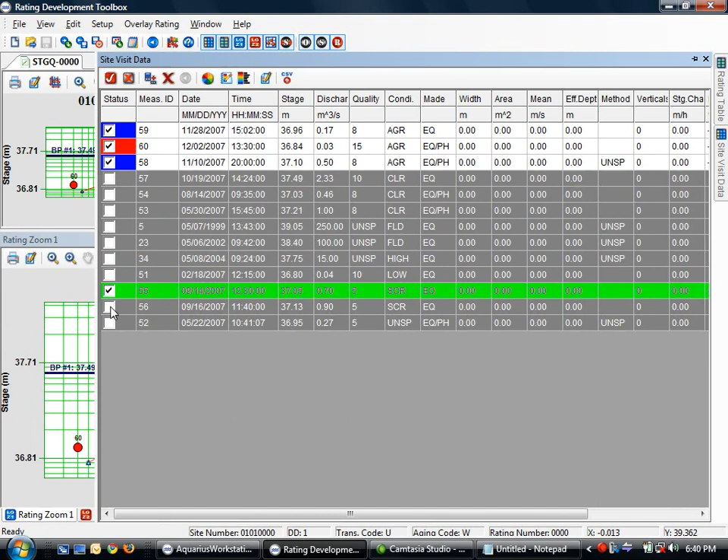And we've got some scour measurements down here at the bottom. So I've just switched on my measurements that fall off the curve. And you can see here, indeed, those are the measurements that are falling off the curve, and they're falling in the correct directions. Now let's look in our time series view over here. And you see that my green measurements that fall below my base rating curve, they're the scour measurements. They're on the rising limb of this hydrograph. And my fill measurements over here, aggradation of the control, fall on the falling limb of the hydrograph.

Now this is very typical. When you have a rising limb of a hydrograph, it tends to scour out, and then on the falling limb of a hydrograph, you tend to get fill on the control feature. So in this particular case, we're probably going to deal with two shifts, and we're going to shift in between this peak on the hydrograph and then back down. So to do this, we're going to start in the shift manager. And I don't have any shifts here, that's why most of the controls are actually grayed out, but I'm going to start by inserting a shift. Yes, I do want to insert a shift.

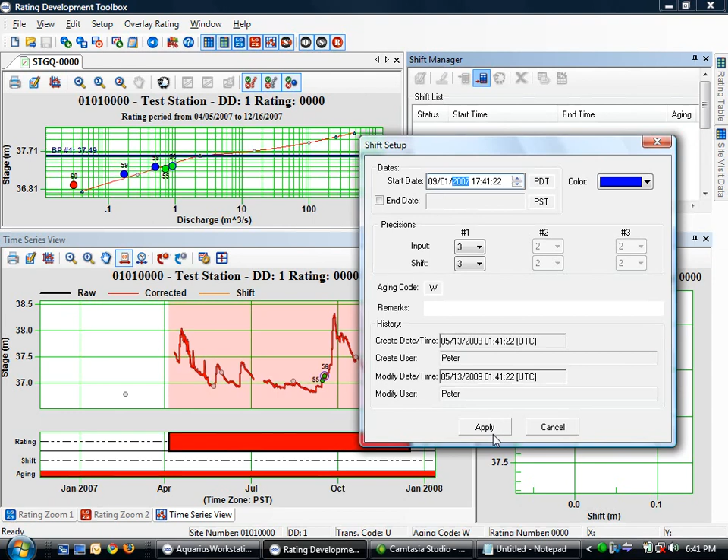Now the start date for this particular shift is something we're going to have to look at very judiciously. So the start date on this particular shift is probably the start of the rise of the hydrograph. So in this case, maybe around September 2007. So I'm going to go to September. I'm going to start it on the 1st. We can adjust these dates later. And it's 2007. Now I'm not going to define an end date at this particular time. We're just going to let it prorate forward. But we're going to come back and probably define an end date for it when we know when it should end. I'm going to click apply, and you can see here I now have a shifting bar here that's saying that this particular shift is in effect for this time.

Now if we look at how we construct a shift, I'm actually going to pin this off to the side so we have a little more room to play with. So my shift manager is down on the side. We have various inputs and we have various shifts to those inputs. These are both values of stage. So this is essentially a stage value where I want to pull away from my base rating curve, and then the shift value is how much do I want to pull the rating curve apart from the shifted curve.

So the inputs here of 0.1, it's the default value, but it's not going to match the stage values that I'm dealing with here. So the first input, probably useful to put that around 36.8, around the bottom of my curve, maybe 36.9. So I'll put that in as my first value. And I'm not going to apply a shift at this point, but now I'm going to turn on my second shift point, and it's going to go 0.1 up from me, so around 37.

Now I actually want to go up to around 37.4, 37.5, because I know my shift is going to blend back into my base rating curve, essentially where I'd make a transition from section control to channel control. And we talked about that in the previous video. That's going to be about what my break point is. And if we look over here, my break point is 37.49. 37.4 is probably a good value to start coming back into the base rating curve at.

Again, we can adjust these later. We're going to do most of this stuff visually. These are just some good starting points for us. A few other things in terms of adjusting the date and times associated with our shifts. You can start by changing the start times and end times. You can tell it to snap to specific values. So if you only know to within a day, you can tell it to snap to the nearest 24 hours. And all of this we can do down on the bottom here as well by adjusting the dates of applicability. But let's go ahead and start developing this shift.

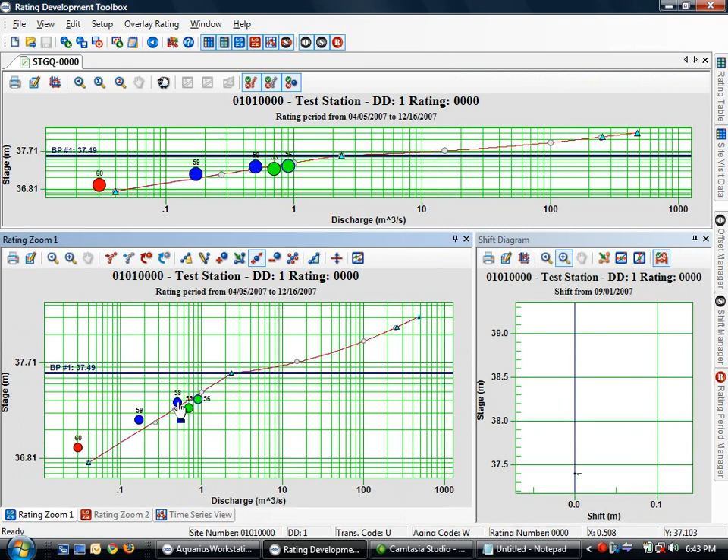I'm going to click here. I'm going to go back to the shift diagram over here, or sorry, not the shift diagram, the rating zoom 1. And we're going to look at shifting this curve out to hit these measurements 56 and 55, the ones of the scour condition. So let's rescale ourselves over here in the shift diagram. And the shift diagram is really where we're going to develop the shifted curve. And you can see here the measurements falling above the rating curve and these measurements falling below the rating curve.

And what we want to do is essentially pull our shift points out and split the rating curve at a certain point. And you can see I've done that right there. I've shifted away from the base rating curve to form that. And that's a very classic shape. That's called a knee bend. This is the hip, the knee, and the ankle down here. And essentially what I'm saying is I want the base rating curve above a certain point. I'm going to break away from it and do a smooth transition. And then eventually, we don't know any further below there, so we're going to apply a constant below that.

And you can see what that shifted rating curve looks like right here. We'll look at it in log space. We'll just zoom in right there, and you can see I'm attached to the base rating curve at the transition, and then I go through those two measurements, and then I continue on down. So that's what that shift looks like. If we want to look at that in rectilinear space, we can do that as well. We'll have to zoom in quite a bit here just due to the scales.

So let's zoom in all the way down at the bottom of the rating curve. And you see there, in rectilinear space, there are my two measurements falling off the base rating curve, and I'm adjusting my curve to that blue line that's going to fall away from them. And again, I join back in around the transition to section control.

We can click on these measurements and have a look at the error and what we're dealing with. So the original error was 42.6%, but due to the shift, we're now within 0.2% for this particular measurement. Let's look at this one, measurement 56. Again, very small errors associated with them now due to the shifted curve.

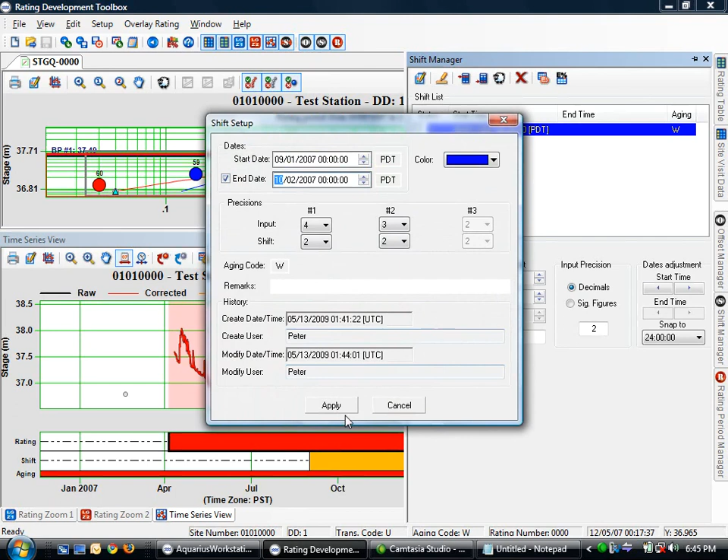I don't need to get the date exactly because I'm going to edit it visually. So let's say just enter October here. And if I click apply, you can see now the end bar associated with it right there. And if we zoom in a little bit on this, we can actually click the time adjuster to adjust the date. I click on that bar, and now I can just drag it back. And I can pick that peak right on.

Now I'm snapping to the full day here because you remember in the shift manager I specified to snap to exactly 1 day. So I could say it'll go till midnight on that particular date, and that will be the shift that will apply in between that date and the end of that particular time. We'll do the scoured condition for the entire time.

Now what are we going to do after that? We're going to want to shift in the opposite direction because we're going to assume at the peak of the hydrograph we start filling the control. The energy of the creek is going to start going down, and we're going to fill up the creek controls until we reach measurements 58 and 59, which are on the opposite side of the curve due to the fill conditions for them. So what we're going to want to do is go into our shift manager, and in this case we want a shift that's very much the same shape, but it's just in the other direction.

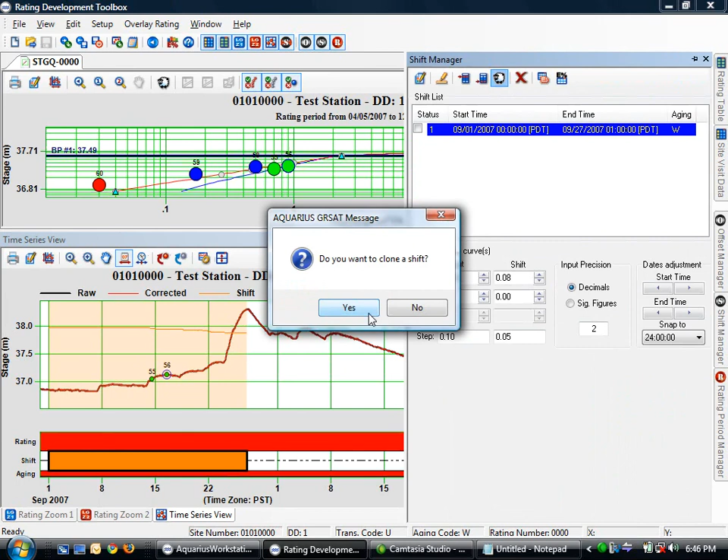So rather than entering all those values anew again, what I can do is use the handy clone tool, and I can click on the shift that I have and I'm going to clone it forward. And it says, do you want to clone this shift forward? Yes, I do. And let's pick a better color. Green is not a good color to start with. Well, actually we used blue before, and red is our base rating curve. Let's use maybe a purple or a violet. Maybe a dark teal. That'll be a good color.

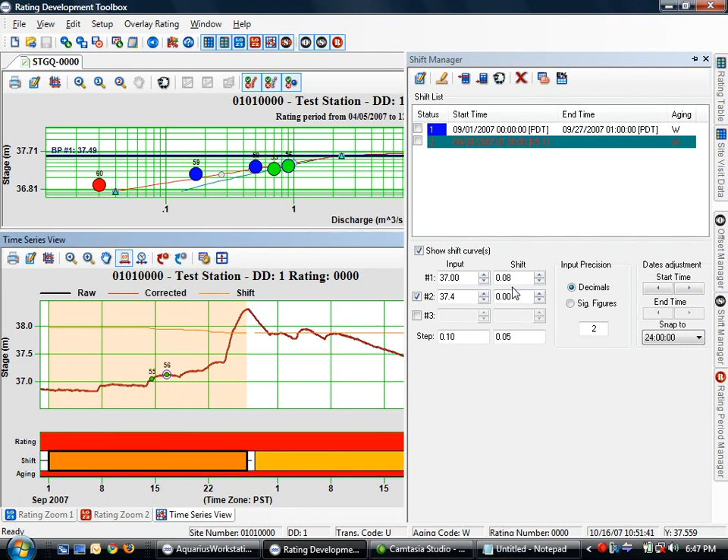And we don't need to define an end date for this one yet. We'll come back to that. If I click apply, we now have that particular shift. But in this case, we don't actually want to shift in that direction because this particular shift, we want to shift out to measurements 58 and 59. So we're going to use the tools over in the shift diagram again to move ourselves across. I'm going to click and I'm going to grab shift point 2. I'm going to move it across. There we go. And you can see now I have a different shifted condition.

And I go back to my zoom panes, and you can see once again I've now blended my base rating curve, very much the same as I did at the beginning, and I'm shifting out in the other direction. A knee bend style shift, but this time in the direction for filling up of the control, for aggradation of the control. And you can see my rating curve doesn't quite extend down far enough to hit measurement 60.

So if we get back into base rating curve here, we can insert another row below this in my base rating curve table, maybe go to a flow of 0.01, and a gauge height for this is probably very close to my point of zero flow, which would be my first offset. So I think the offset we're dealing with here is 36.7. Yeah, I can see it right there. That's the offset value, again from the rating development course we took.

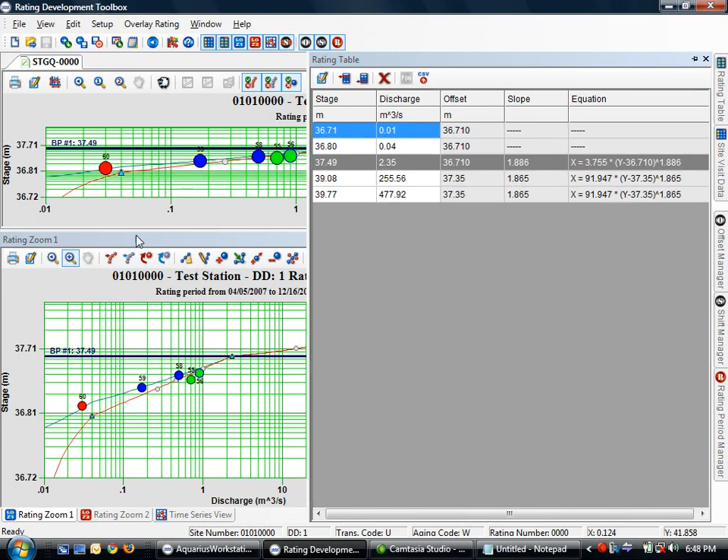36.71 is going to extend my rating curve back down to 0, and you can see there the extension of my rating curve and the shifted curve all the way back down. If I rescale my axes here, we're going to see a little bit more of the bottom end of the curve. So we've shifted in both directions now.

We can look at the dates of applicability for those shifts. Let's move ourselves back out a little bit. Let's have a zoom here. And we can see for measurements 58, 59, and 60, we have the dates of applicability for that particular shift. Now, because we cloned that shift forward, it cloned it forward to start a second after this one ended. So we may want to adjust this end date, and we can do that right here. We can just blend one into the other and just snap them up against one another.

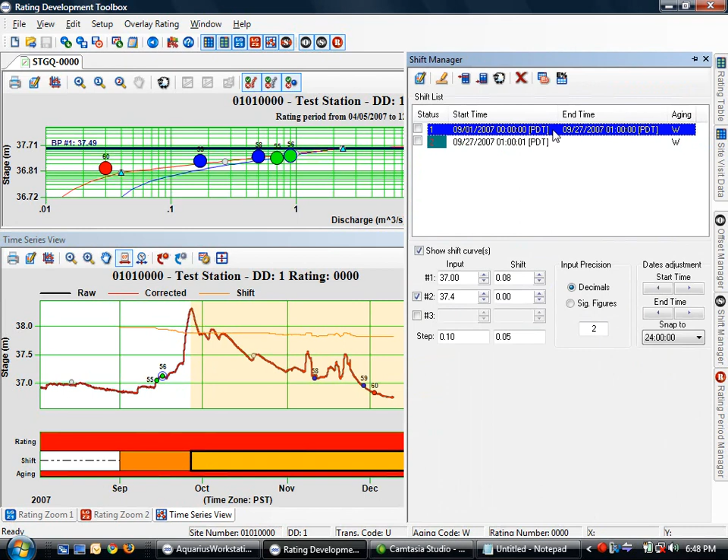Now, one thing we may want to do in this particular case is if we don't know the exact date and time in between these two, we may actually want to prorate one shift into the other. Now, to do that, you use the shift manager, and for the first shift, rather than applying an end date where you know it finishes and applying the shift as a constant in between the two, you can click on here and not specify an end date. It's not going to change anything per se, but what it is going to do is take the shift as a constant right here, and it's going to prorate it forward until the next shift comes forward.

And what we can do is actually have a look at what that curve looks like by using something called the time slider. If I click the time slider on, it gives me a purple line, and essentially it tells me what shift is in effect on that purple line, date and time. And if I move myself back into the first shift territory, say right here, you can see that I'm prorated inwards from these particular measurements. So I've time prorated. If I move the time slider again over here, you can see the shifted curve is in effect right there. So we actually get time proration in between.

Now this is probably something we don't want to do in this particular case, just because now the true error we've associated with these measurements is actually quite large. So the shifted error when it was applied as a constant was very good, but now that we've prorated things, we have a true difference that's actually quite high. So I definitely want to go back into my shift manager and apply an end date to this one. And we'll stick on an end date of 10. And it'll warn me, I think, if things are going to overlap.

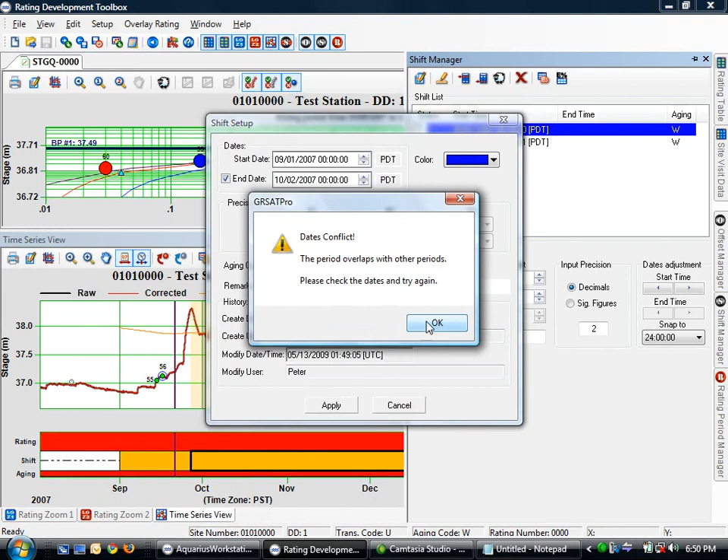Yeah, the dates conflict, so I'm going to have to move this one back a little bit just to make sure. We'll go back to the 30th. Still conflicting. I need to look at my dates a little more closely. Let's go back to the 20th or so. And I can always move this forward. There we go. And let's just move that one forward now using the adjuster. We'll just snap that one all the way forward. Can't go any further. That's good. So now I've got it back to the original state.

So that's the shifting of the rating curves. It's a fairly simple process. The type of shifts I've talked about here are the knee bend style shifts. These are very typical style of shifts for bottom ends of rating curves for section controls. When you're dealing with shifts to the higher flows, channel controls, they're generally due to things like weed growth or bank erosion that would typically be more temporary adjustments to the rating curve. So those would be generally temporary shifts as well until you have enough points built up to redraw the rating curve in a new rating curve and define something new in terms of the rating period manager.

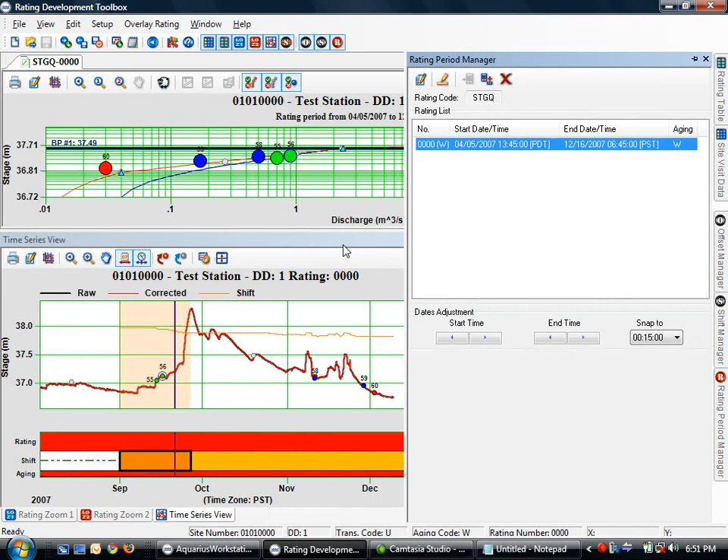So once we've got that complete rating curve, including all of its shifts applied, now we can go ahead and start doing a computation with the rating curve. And that'll be the subject of the next video.